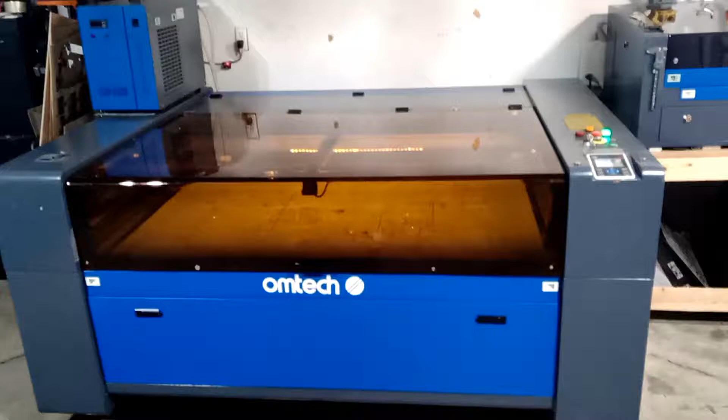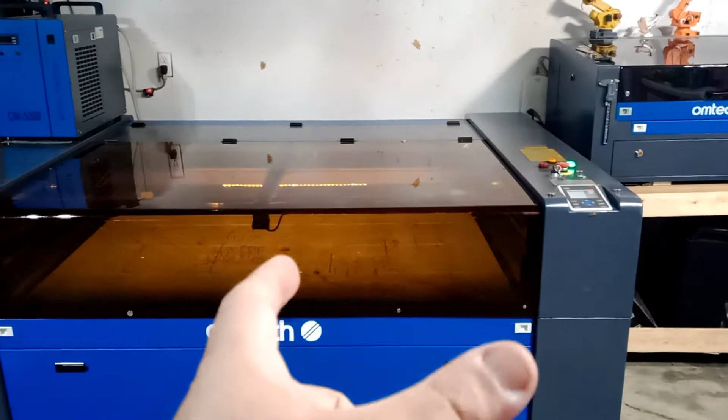Hello everyone, today I'm going to be showing you how to hook up a camera on a big boy for LightBurn. A lot of people are asking, is this possible? So we're going to learn today how to do it together, if it's even going to work. Because of the big bed, I am using a fisheye camera, basically wide angle. So we'll see how that's going to work. The first time hooking it up, we'll go from there.

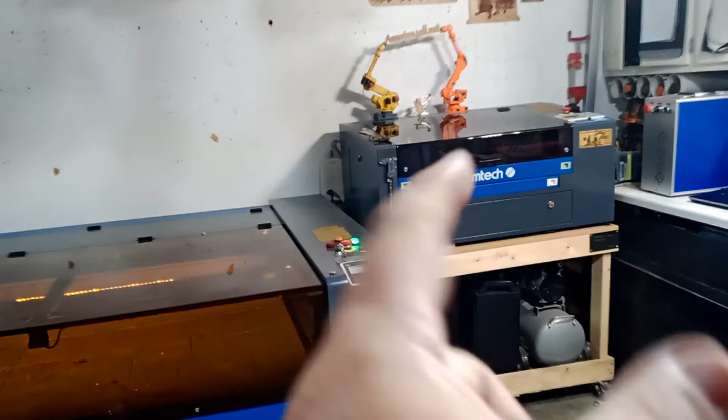Again, I do have one on my small one that I removed because it had a fisheye, and I'm gonna put it here. Actually, I already did. And on the small one, I put just a webcam that I had reviewed, one of the good ones actually, and I did the bedside. Everything is okay. So let me show you, George. My son's gonna go ahead and open the big boy bed.

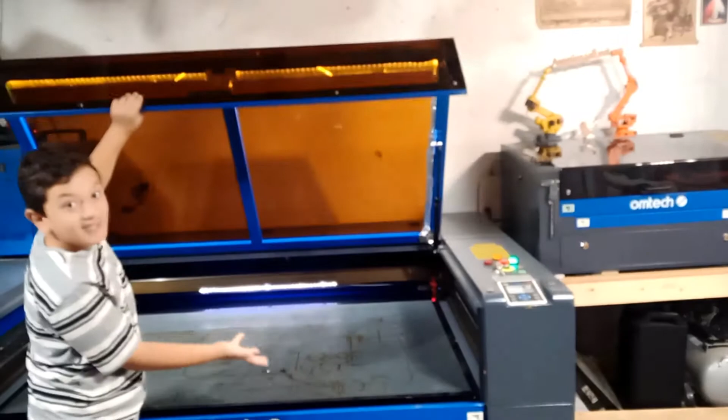Okay, so here's what we did. Basically, we installed the cam over here. I'm not sure if you can see it. It's over here. The way I did it, I actually glued it with crazy glue here, so that way it will never move. On the old one I had it on this mount here, and this guy was moving, so I'm gluing it. Plus I actually added light.

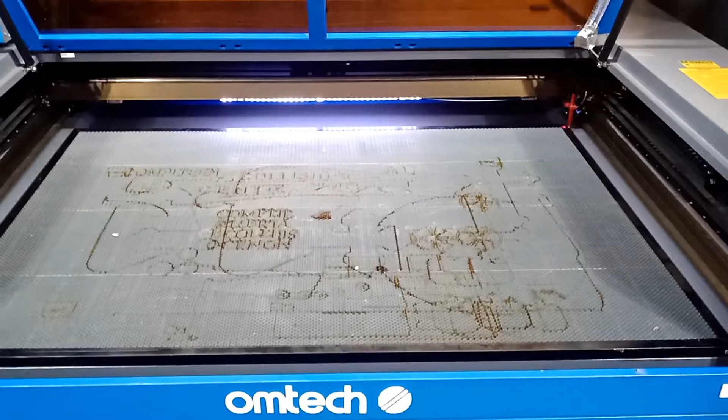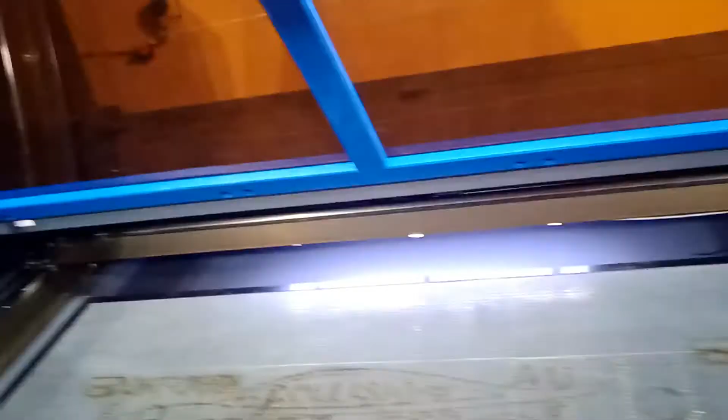From my experience on the old one, I actually changed my light, hitting from up down, so it will not reflect on the camera basically. And plus I put reflector tape here, so when I close the bed cover, light will not hit up here and bother my eyes if I'm recording for you guys. But still, the lights are very strong. It lights up the whole bed.

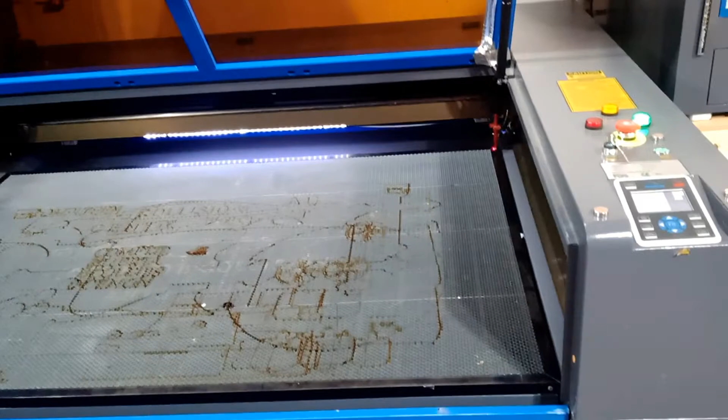Actually, there's so much light sometimes that if I put an object, especially looking at the camera, I won't see it well. But there's a trick I do: usually I turn the garage lights off, and that takes care of it. I can just turn the machine light off. Okay, and what I did, just some stuff to update.

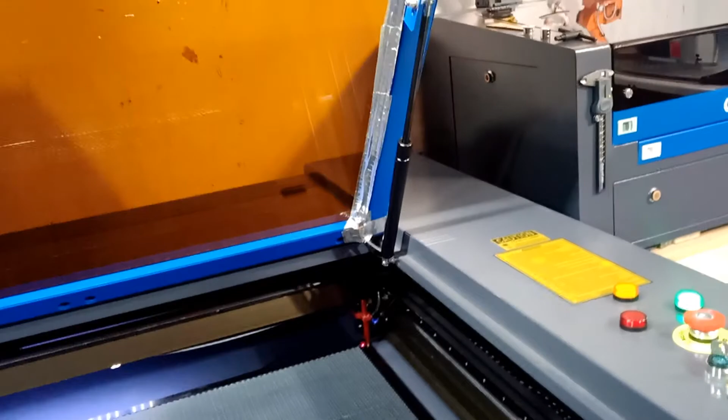I ran the wire through here, put this tape, basically not two-way tape, it's reflector tape. It's not one of those nice jobs, but hey, better than nothing. It's doing the job, so I'm not gonna organize it right now. It works. I ran it all the way in the back, into the hole, and it went down the machine this way and came out. I made a hole over there that it came out of.

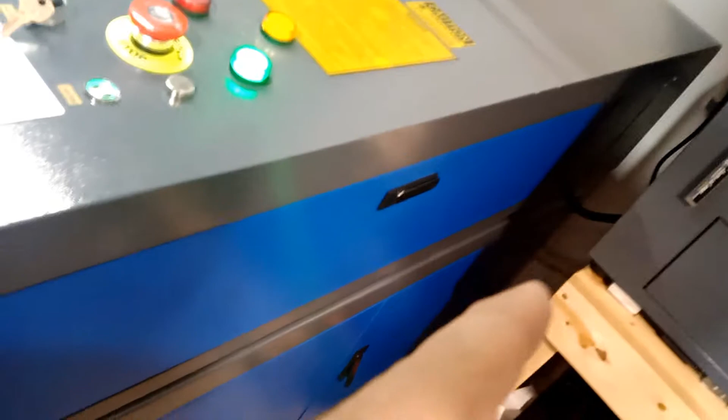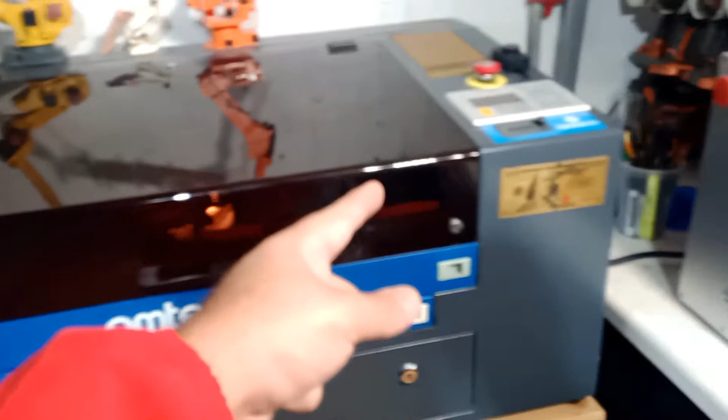Now I did one more thing while I was doing this. I actually eliminated this USB cable from here, because every time I was walking or doing something, it was in the way. I do have room over here, but it's just better not having a wire in the way. I'm never gonna unplug it, so I opened those two screws here, took that to the back, and ran a USB extender all the way, behind this big boy and behind the fiber optic tower, to my laptop.

The good thing on my laptop, I have the Dell Latitude. It's one of the business class laptops, and I purchased a dock station for it from Amazon. The reason I purchased this is not because I want the wires organized, but because I have so many machines and cameras hooked up. On the Dell laptop, there are 1, 2, 3 USB ports.

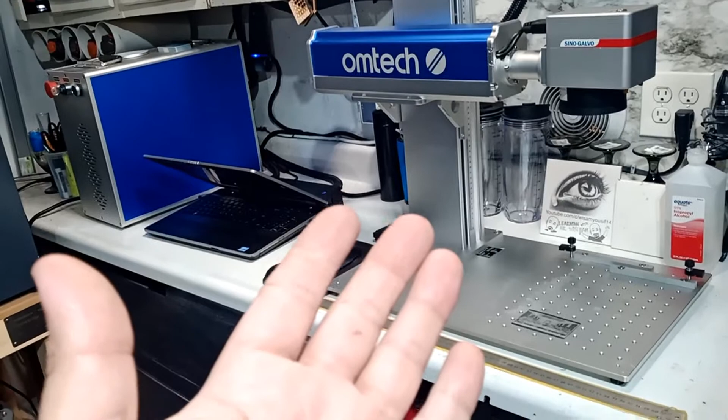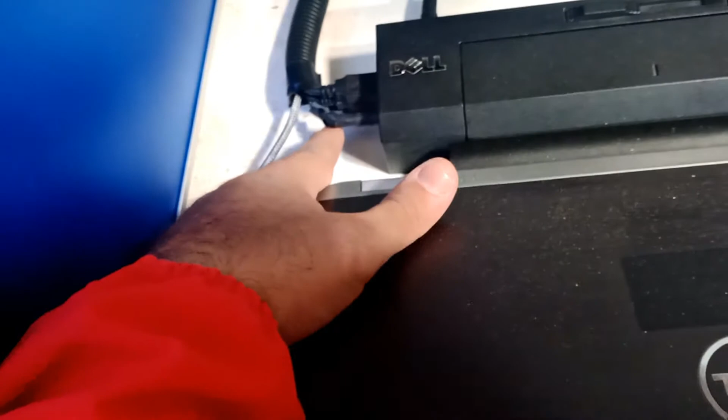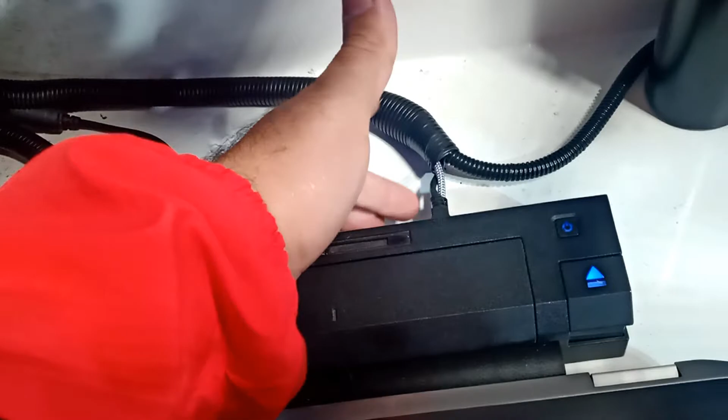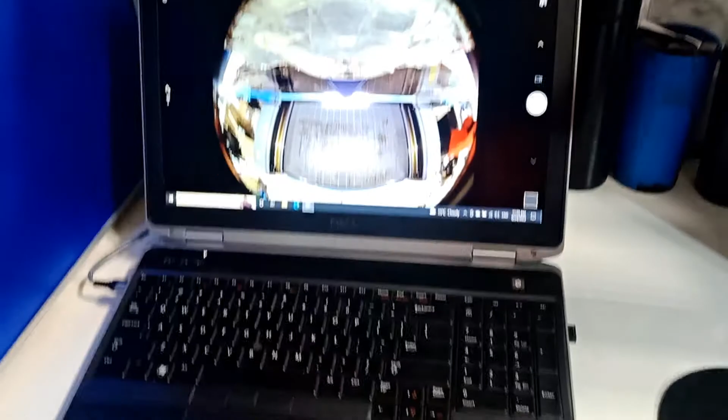So what we did, just to let you know guys, to start with, when you align your camera, there's a program in Windows 10. If you have Windows 10, you can just always open a cam and it will show you the USB. As you see right now, this is the USB, okay? Very clear, but if I put an object here sometimes, it's not clear 100%, on the camera at least, but I can see it very clear, which is just amazing,

especially with the lights always reflecting. Again, this is a wide fisheye angle camera, and I installed the other one, same thing, in here. I did a review on this one here, and this guy I actually ended up gluing, here and here. I just glued it, and actually it does the job fine too. So let me show you that one too.

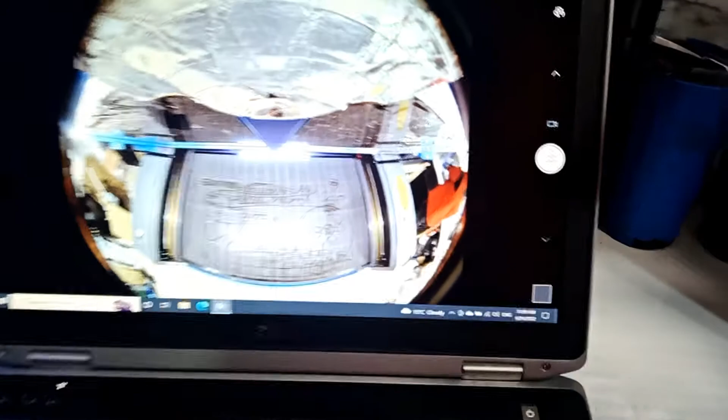All I'm gonna do, I'm gonna go here and switch between cameras, and here's the camera, so it shows the whole bed size. Okay, so that works fine too. And then we're gonna open LightBurn, and we're gonna go from there, explain to you how to do this.

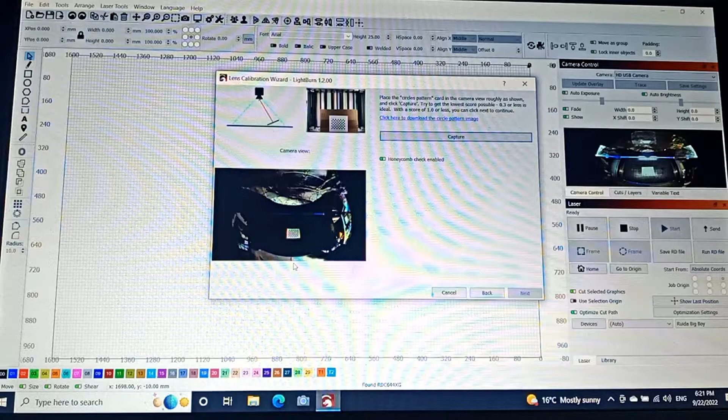Click next. Don't worry about this image here. All you're worrying about is the quality. So click next. Now it's telling you to bring it to the front of the machine. We're gonna drag it all the way to the front of the bed, the actual picture. So we're gonna click capture, and let's see. I'm looking for a great. Here you go, 14, great. Click next. Even here it's distorted, but don't worry about it.

Now we're gonna go to the side on the right, okay, the left of the bed. Now it does say to try twisting it. I'm gonna keep it as it is, not twisting it, because it's showing it in the box here, so it's kind of confusing. Am I twisting it, or am I putting it in the box flat? So I'm just gonna keep it flat. Capture,

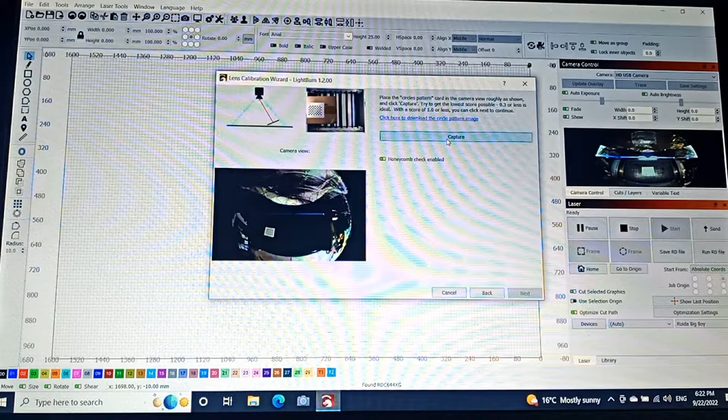and I have 28. It's great, but not that great. Let me see if I can get better. 29. It got worse. So let's see. Maybe a little bit of lighting will help. I'm gonna put it in the middle of the bed, and I'm gonna give it a little bit of lighting.

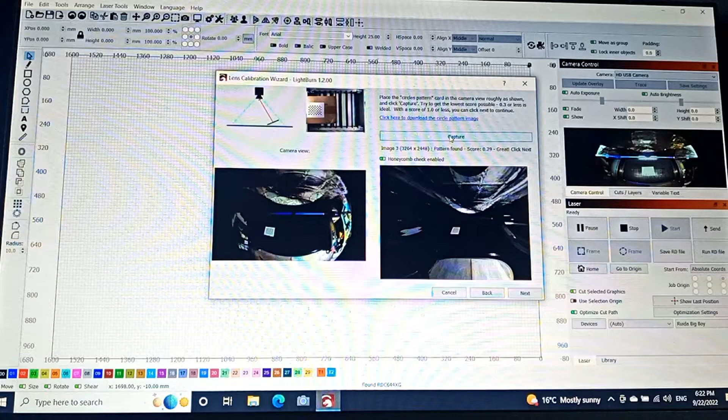Okay, let's see. Click capture image. 27 - it got better. We'll go next because it's still great.

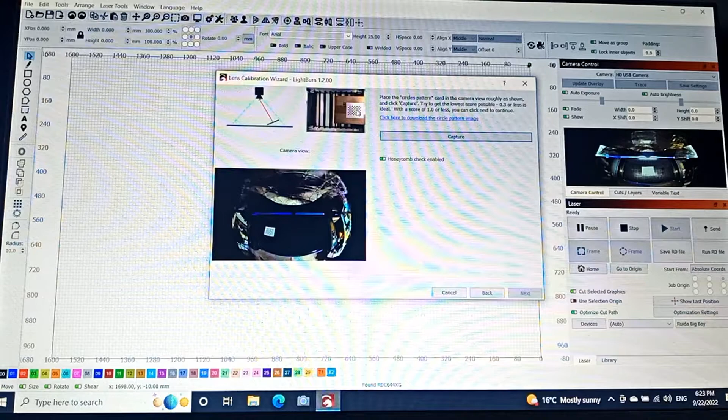Now it's telling me to put it all the way on the other side. So I'm gonna turn one light off and turn the other light on in the other room, and we're gonna move this guy over here, then click capture image.

Don't worry about how this looks because it's a fisheye. Not found - it's just the lighting, a weird angle. Let's see, now it should find it.

29, still great, click next. It's gonna ask me to put it all the way in the back. I put it all the way here, in the center, in the back, and then capture again.

24, and now click next. Now it gives me these options. I can do those 4 corners, but it looked like it already gave me an escape option, so I don't have to do this anymore. So I'm gonna escape.

Okay, escape, escape, escape. Now it's telling me to do the alignment of the camera. Do not click finish, do the alignment while you're there. So we're gonna go to alignment, okay?

It's gonna open a different screen, it's gonna show you this. Now it's gonna be a little bit different. Now we're gonna turn on the machine - I had it off for a minute - and then we're gonna click next, okay?

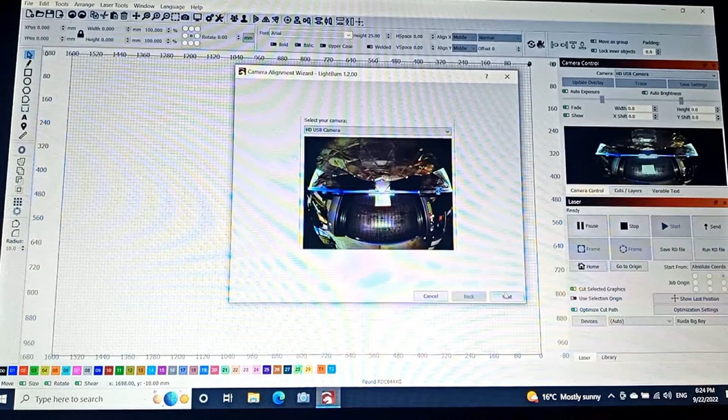And now I'm gonna put a piece of wood on the machine, okay? So let me explain to you what I'm gonna do. I'm gonna put a piece of wood here so I can engrave on it.

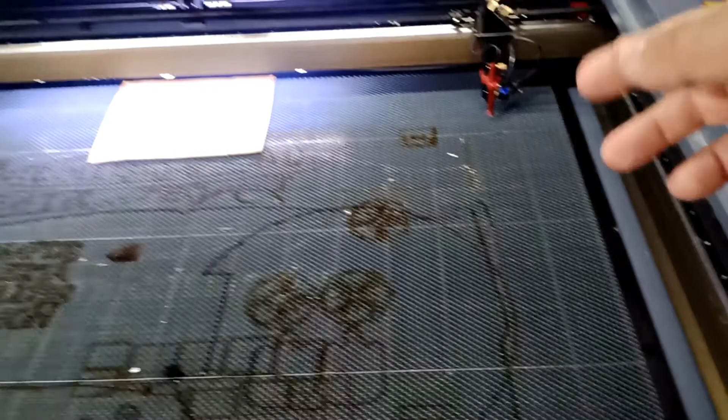Of course it's gonna ask me for a big piece of wood or something, which I am gonna do because it's the big bed, so I recommend putting something big. I understand you're gonna end up wasting something big, so try a cardboard or some material that you don't use.

So we're gonna try - I had this old material. I'm gonna use it as a sacrifice material right now on the corner, because what the machine is gonna do is basically engrave this: it's gonna do 1, 2, 3, 4, and a mark in the middle. So that's why it's gonna be a sacrifice material.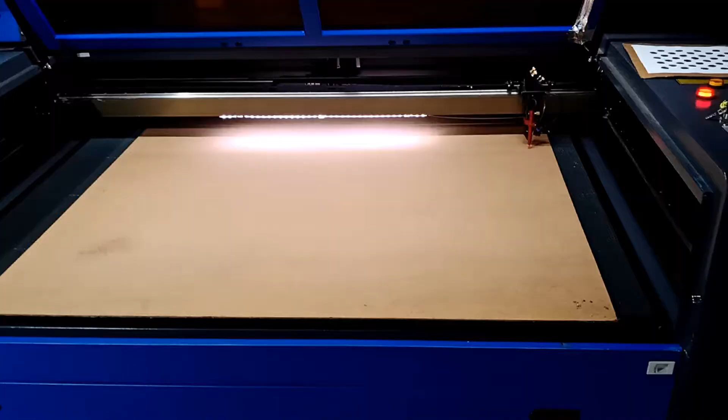So let me show you what I'm gonna put in here - something very big. It's basically a piece of wood, okay, but it's not that great of a material. I think they call it MDF or something, but again, I'll use the back side, okay?

So now we go and we'll change the 450, we'll do it maybe a 400. We want to go the biggest we can, so we're going to go for 400 - almost to the edge.

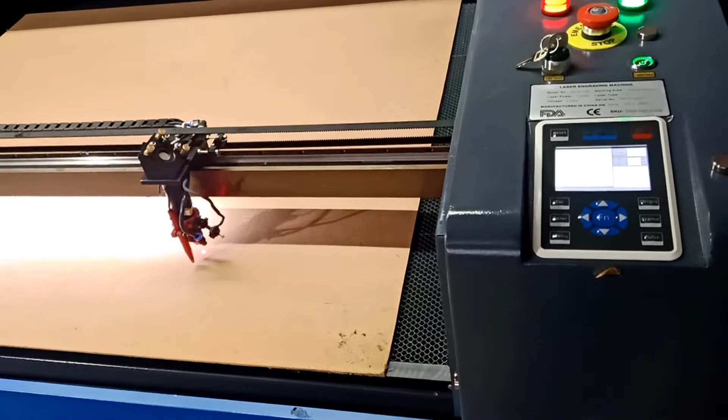So one little thing - I close this door, okay, and I do not recommend leaving the door open and doing the alignment, but I close the door, and it's gonna be a lot of smoke right now because I'm covering almost the whole bed and there's no air coming inside, so it's gonna be smoky. I'm gonna go in there right now after this adjustment, and I'm gonna click start so I can show you guys the machine's gonna start again.

So we're gonna start, and the machine is gonna start engraving. It's gonna have a lot of smoke. I'm gonna fast forward this so you don't have to actually wait and see all this, okay?

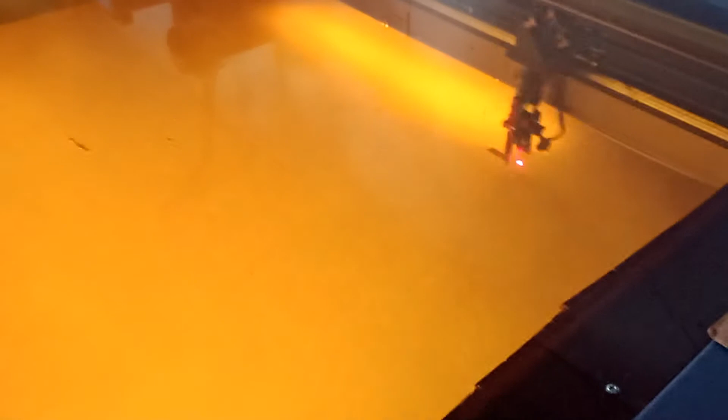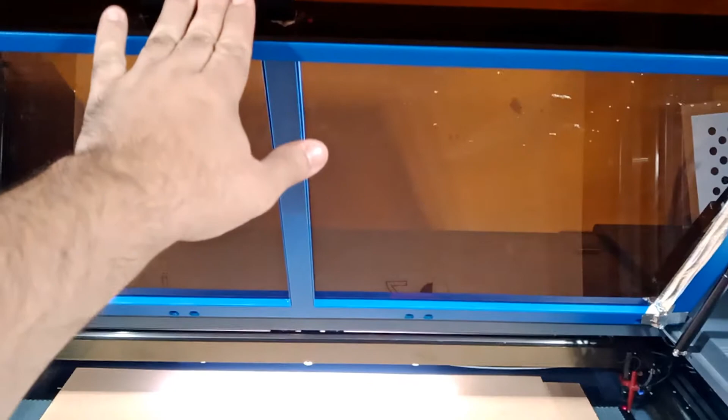So after the smoke clears, okay, I'm opening the cover right now. So I open the cover, there's still smoke. Now just make sure that this is all the way open, okay, and it's not gonna move - so a position that is gonna stay.

So this is what actually it engraved. You can see it engraved big number 1, 2, 3, and 4, and a circle in the middle that we're never gonna use. I don't know why even this is here, but it's okay.

Okay, so now we're gonna go to LightBurn right now, and we're gonna select, take a picture, and try to select the center. For example, on one, we're gonna try to select the center of this point, which is here, to tell the machine exactly what point is where.

Okay, here's LightBurn now. So for example, we're gonna click next after we finish that, and here it's gonna ask us if you want to move your laser somewhere else, so we can move the laser all the way basically next to the home position, which it already is.

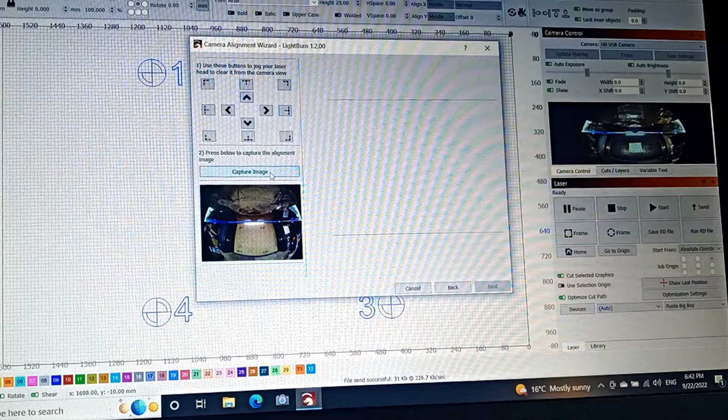Okay, and then we're gonna click capture image. It's gonna take a picture of the actual bed. We can take a couple of them if you're not gonna like the image, but this is a picture. Don't worry about it if it's not clear here. You're gonna click next, and you can actually zoom in.

So here it's telling you click to mark number 1. So we're gonna put our mouse to the 0.0 here to mark number 1. We're gonna try and go here in the middle of number 1. That's number 1. Now it's gonna say mark number 2.

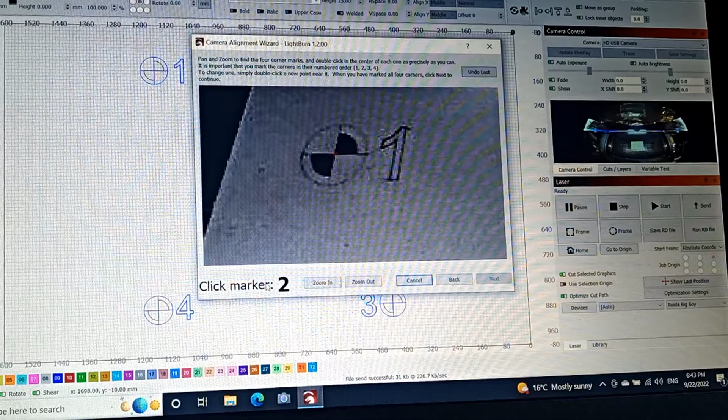Zoom out. You can zoom in here, or you can use your mouse, zoom in and out. So I'm using my mouse. We're gonna zoom into number 2, and we're gonna actually go and click in the middle of number 2, as middle as possible you can think of, and then we're gonna zoom out.

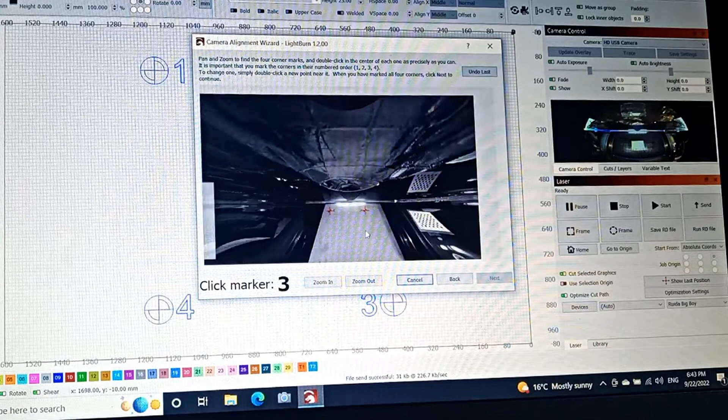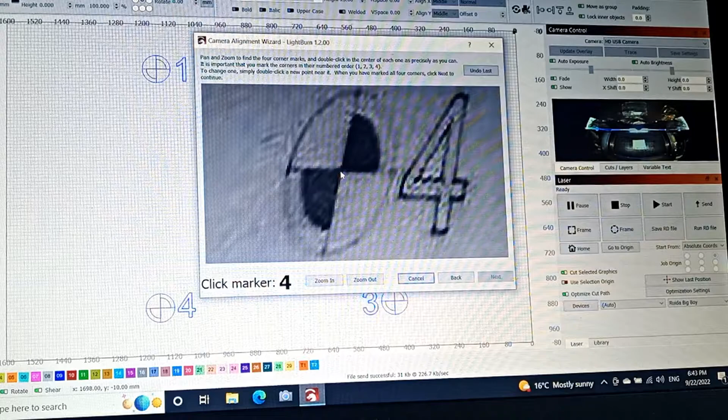We're gonna go to number 3, and we're gonna go in the middle of number 3 somewhere here. That's number 3, and when we click number 4, it's gonna make a box telling the laser this is the actual alignment. So we're gonna click in here, so now I made a box. Okay, and now we're gonna click next, and now finish.

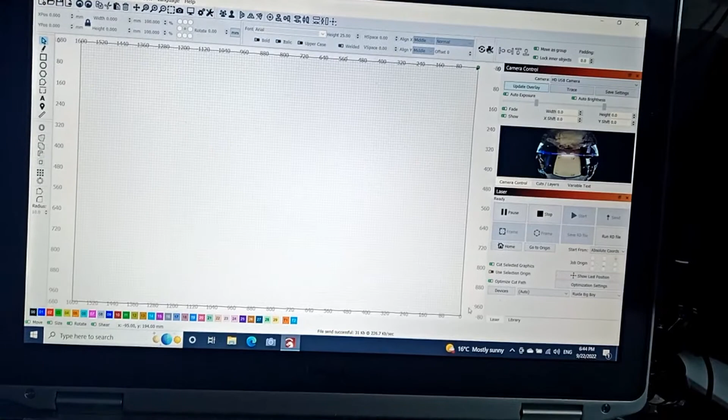So if I take a picture right now, if I go to LightBurn here right now and click update overlay, it should show me my bed size. This is the actual bed, the whole bed of the machine.

So to double check this is accurate, what I usually do is go ahead and make 2 boxes. I make 1 box, and then I copy it, click on it, control copy, and make it just a little bit bigger, and then select both of them and center them.

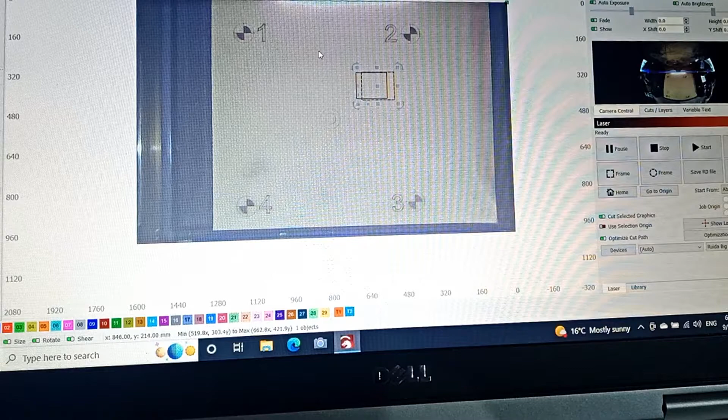The reason I did this, I wanted to engrave this box and take a picture to see if the position of this box is in the same location. So instead of putting a line, because you might not see it, I recommend doing a box.

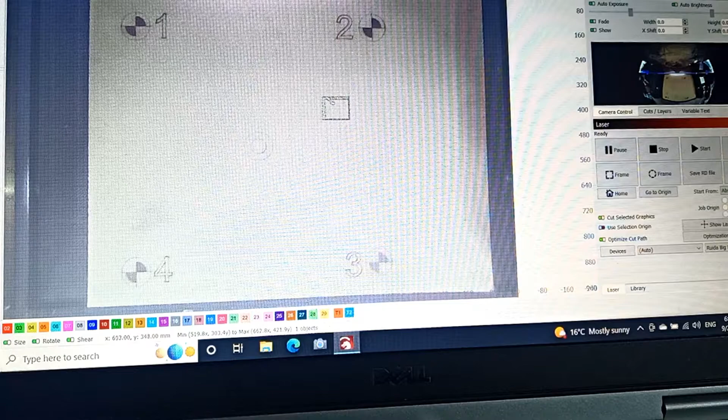So I'm gonna group this box, make it something smaller so it will not take forever to engrave. I'm gonna put it somewhere here, and then we're gonna go layer, same setting, fill. I'm gonna do this one as a 100 interval to have better lining, more lining. And the machine is gonna go in there and start engraving.

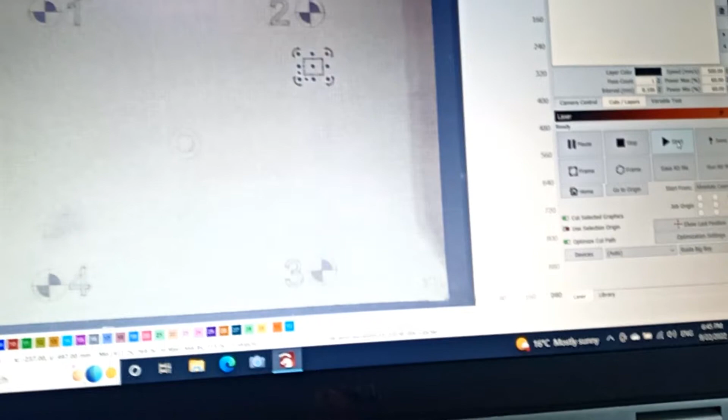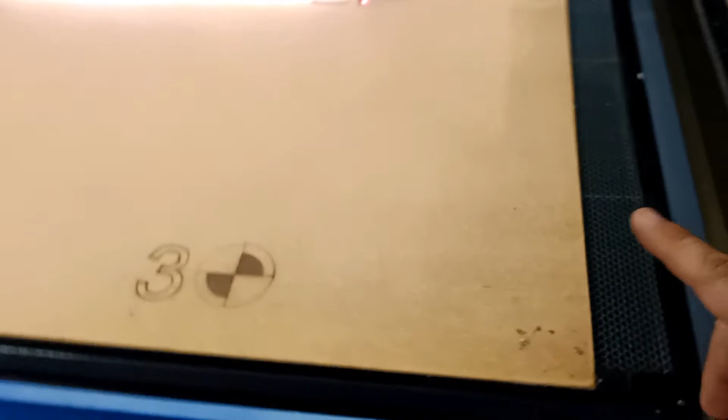For purpose of this video only, I bypass my door, okay, but I don't recommend you doing that. So again, I'm making a box in here, I'm engraving a box, okay.

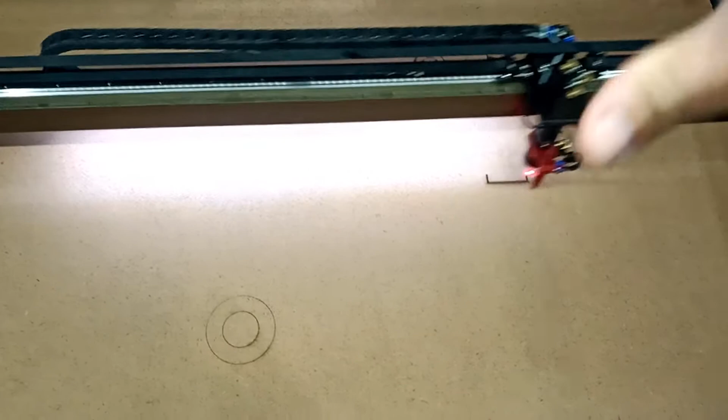So when the camera is gonna take a picture right now, again, I didn't move this wood, I didn't move the camera, I didn't do nothing. I don't close the door and open it. I want to see the accuracy of the actual camera compared to what I did earlier. That's why I did not close the door, okay.

Now I don't recommend you doing this because you might hurt yourself. I never recommend leaving the door open, but this is my own risk, something I'm doing. I don't want you to do this. But this is what I do to calibrate and make sure if the door is moving or something like that. I know because it's a new machine, big bed, so I'm just trying this and showing you guys to see if this works, because I never had a big bed like this.

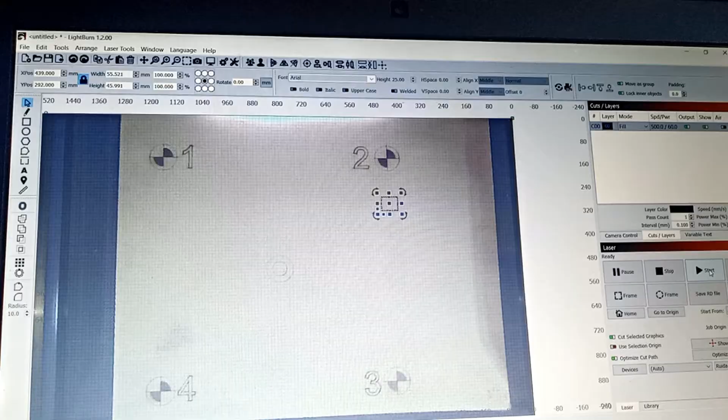So as soon as this is done, I will take a picture of it on the actual LightBurn and we'll compare how accurate this is to the camera itself when it's showing. So we'll go back to LightBurn. I always try to be safe, I wear glasses and all this stuff.

So the idea right now, if I zoom in here and take another picture from the camera of LightBurn, it should be almost dead center because I just calibrated the machine. So if I'm not gonna move this box, I just zoomed in, the box is still in the same location.

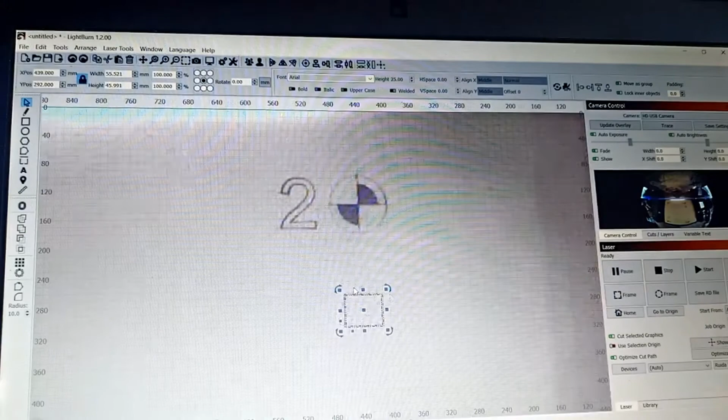That's the most important thing, do not move the box. Go to LightBurn here on the corner and then click on update overlay. So boom, that's how you know it's accurate. It's almost dead center, okay, maybe it's a little bit off in this direction.

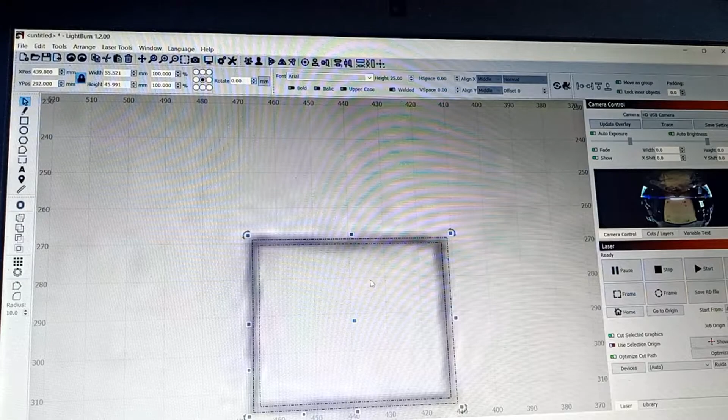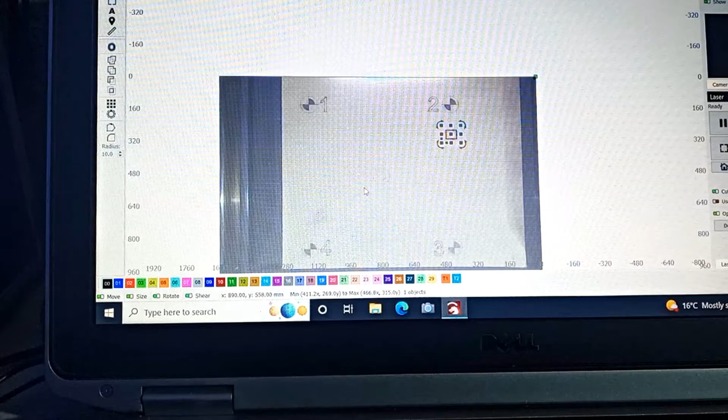We can always adjust the X and Y axis on this, but I'm not building a Swiss watch. All I want to do, for example, is take a picture of something and put my item next to it and then align it.

So you can see the box is actually on top of my engraving. Maybe I can go a little bit again. I can adjust, you can adjust this.

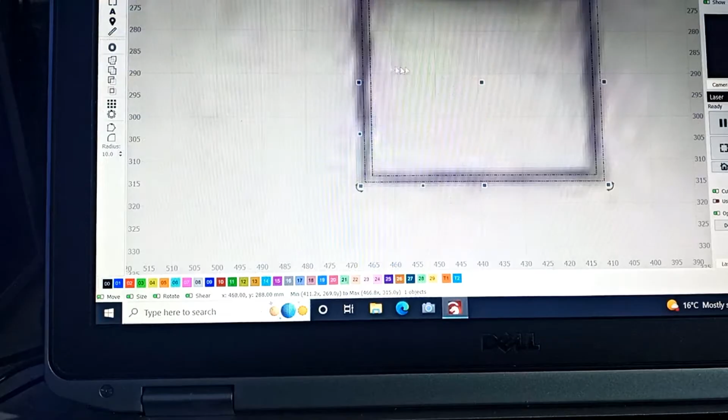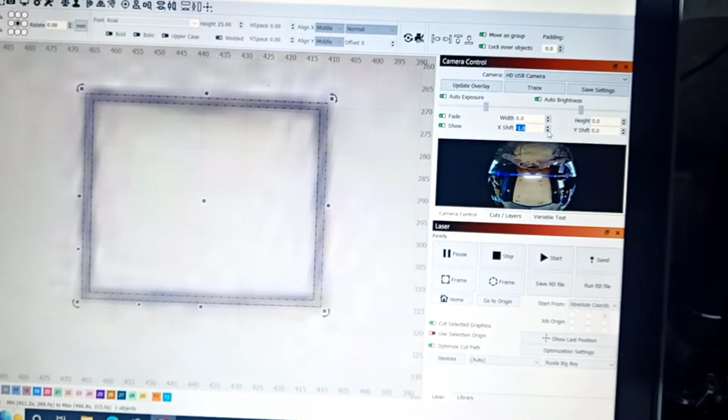For example, here you can shift the X axis and Y axis. So this is the X. If I go plus, see, it's gonna shift the bed left. If I go minus, it's gonna bring it minus. Instead of me moving my camera, I can just adjust this. So now I got it at -1.

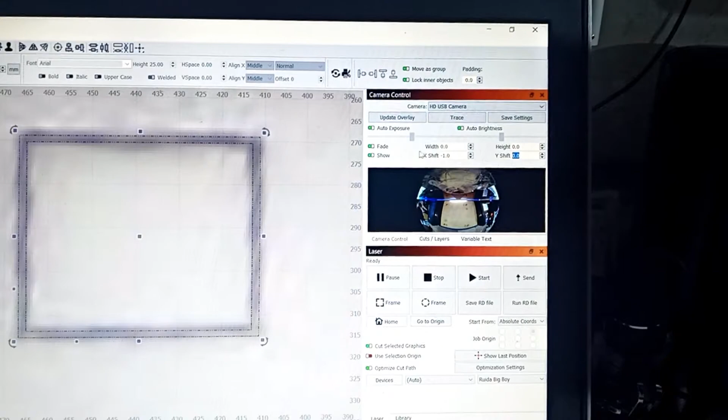I can do the same thing on the Y axis, up and down. So I can go up, you see, I can go down, okay? If I really want to be picky, I can go like this. This is almost maybe perfect, I want to say, or maybe leave it like this. So maybe on the Y it's 0, but on the X it's -1. Then I'll save my setting, click save setting.

Now it's perfect. But sometimes what you want to do is take your box. So now I'm going to make it smaller just to save some time, and bring it all the way in here. I want to see the difference in accuracy here to this corner, just to see if the laser is doing what it's supposed to be doing, okay?

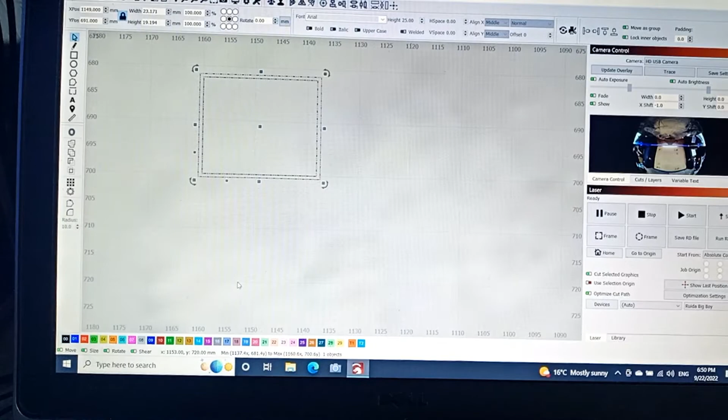And then I'm going to click engrave again, and now it's going to go here and engrave. After I take a picture, it should show me the same result, okay? So we'll see right now.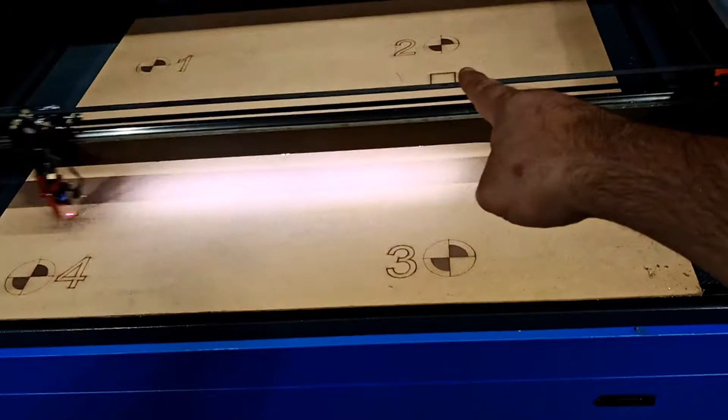So that was the other box I made earlier. Now I'm making a box over here. I just want to test the accuracy of my calibration.

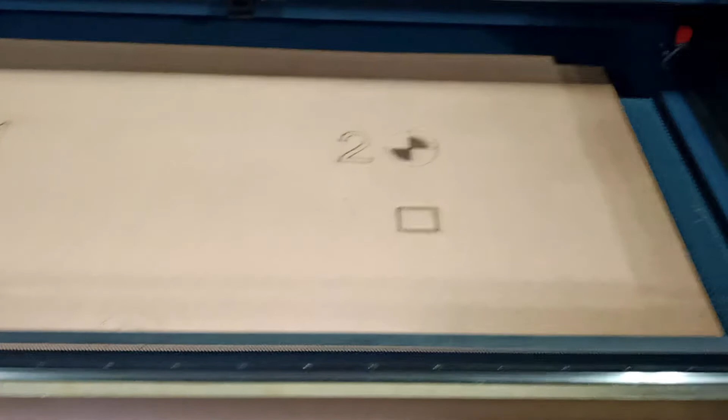If you end up doing this test, take a picture of it again, and your picture ends up somewhere else, you did something wrong, redo the calibration. That means your calibration is not right, okay? So what I mean again, if I would have taken a picture and tried to engrave something and the engraving came out over here, that means you did something wrong with your camera calibration. You chose the wrong option. And usually the way you're going to choose the wrong option, I will tell you in a minute after we do this, okay?

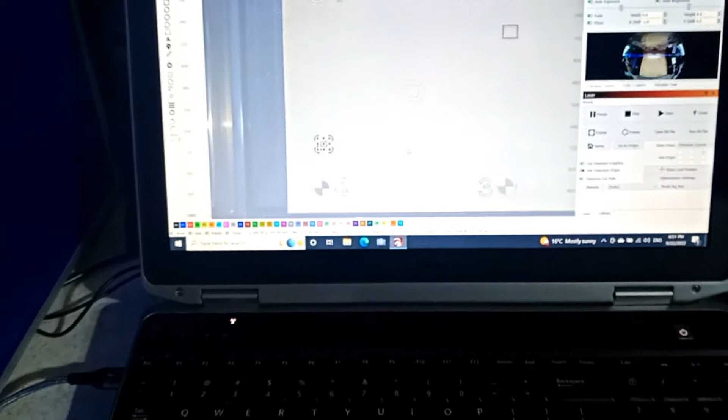So right now, this is the new box. It's still open, and I'm gonna go here and take a picture again, and you can see it's a little bit off, a little bit down. So I can adjust this to, remember we said we can go to minus maybe 5, maybe a little more. Again, it's the big bed, okay?

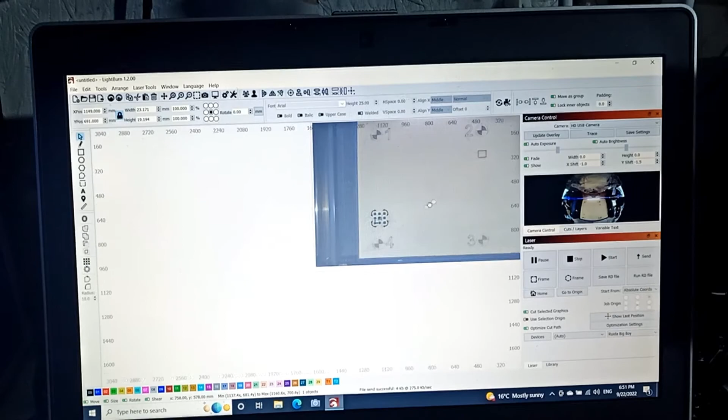So I'm not looking for something 100% perfect. Plus I have a big fisheye lens, okay? So that could be another problem with my calibration, the way I calibrated it, because I can already tell here, like here I'm seeing the guide, here I'm not seeing it.

So my calibration wasn't 100% done right. Maybe I put the wrong paper in the wrong spots. Maybe I should have done the side ones. I showed you how it asked me for 4 corners. I did not do that, okay? So I recommend you, if you want to do it, do it. It gave me the option to skip, and I skipped it for the video.

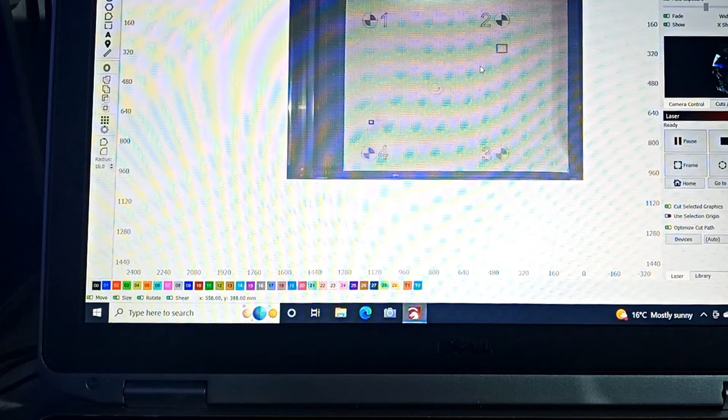But this is actually very good for now for me, because again, all I'm using it for, for example, is to put my sheet somewhere and just guide it, and I'm still going to 100% put it in. I'm not gonna go by this. I have a different trick. If you end up cutting wood and making a mistake, how to redo it again, this will be in a different video, but this is actually just something temporary. It should work perfect, okay?

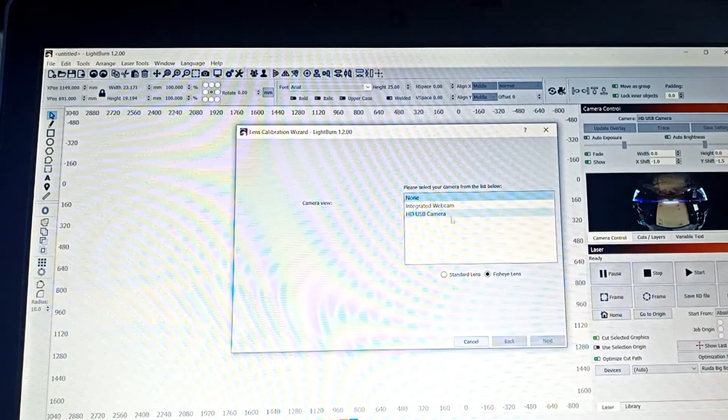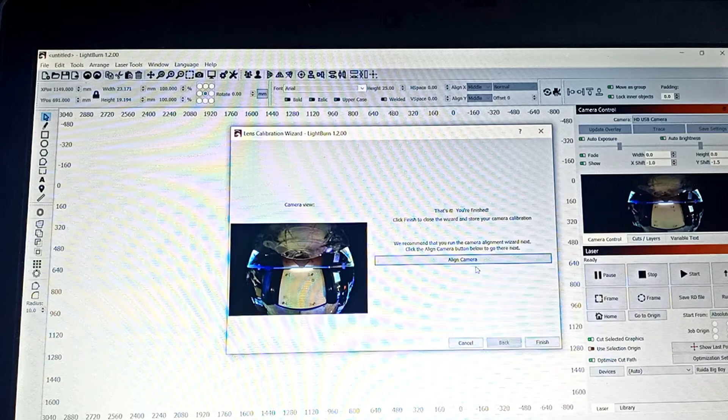One little thing I was telling you earlier, I'm going to show you the mistake of calibration here. When you go to tool and calibrate lens, make sure you don't choose one of these. If your camera is not 8 megapixel and it's not 120 angle, do not click on that, because now you're changing the field of your camera, you're changing everything else, and it will not give you that option. If I click this right now and click next, it's not going to give me the option. It's just going to tell me to calibrate. Alignment, it's not going to give me the option of that keyboard I showed you earlier, you know, that board. So you got to be careful, okay? Make sure you have the right settings selected.